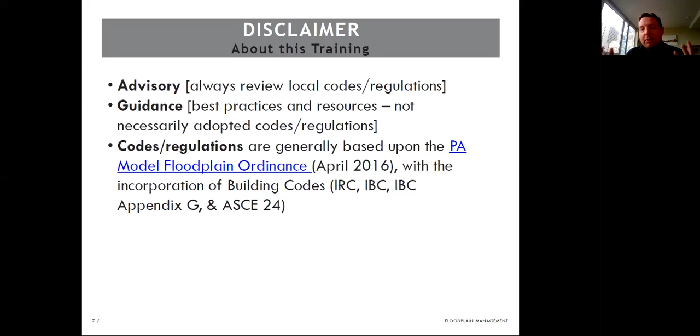Just to give you an idea of what today's presentation will encompass, I always like to start off with the types of flooding in Pennsylvania. These show what happens across the state. We all have riverine flooding. We also have dams and levees throughout the state that could potentially fail and cause flooding events. We're seeing increased rainfall throughout the Commonwealth that are attributing not only flooding, but also landslide conditions, among many others.

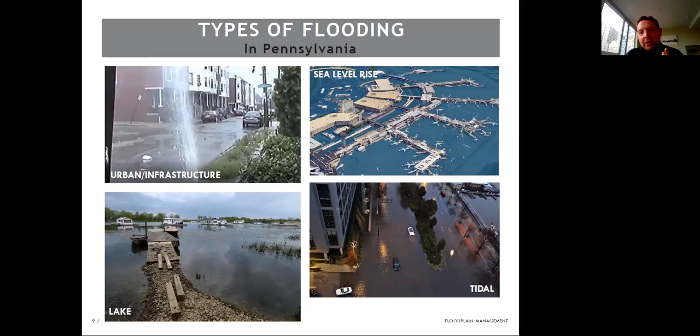Up in northwestern PA, we have lakefront flooding, Lake Erie. We also, on the east coast or east side of Pennsylvania, have the threat of tidal flooding as well as sea level rise. This image shows Philadelphia International Airport slated to be totally inundated by year 2100. So this just gives you a sense of all the different types of flooding.

But for today's presentation, we'll focus specifically on this typical cross-section, typically of a riverine flood condition. We're going to be talking a lot about the special flood hazard area, which is encompassed in this cross-section, specifically known as the 1% annual chance flood event, and formerly known as the 100-year flood event. But 1% chance is the new common language there.

Within this cross-section, you'll see the floodway, which is typically the stream channel, and then on either side the flood fringe, where predominantly where development is occurring today in the Commonwealth, with maybe some minimal development in the floodway. So every time I talk about floodplain management, special flood hazard area, we'll be talking about this cross-section for today's presentation.

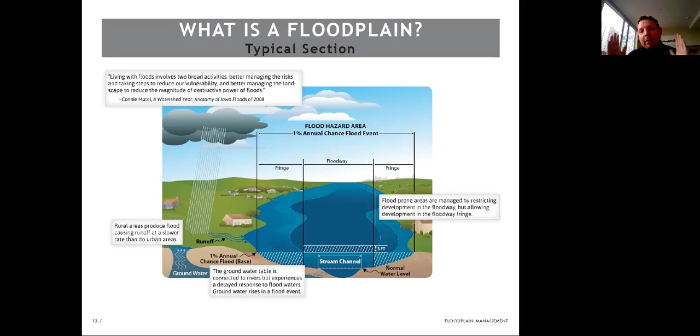I like to start off with some of the roles and responsibilities, specifically the role of a floodplain administrator or floodplain manager. It may even be the zoning administrator or building code official, depending on your local jurisdiction. Make sure you know who is responsible for administrating the floodplain regulations.

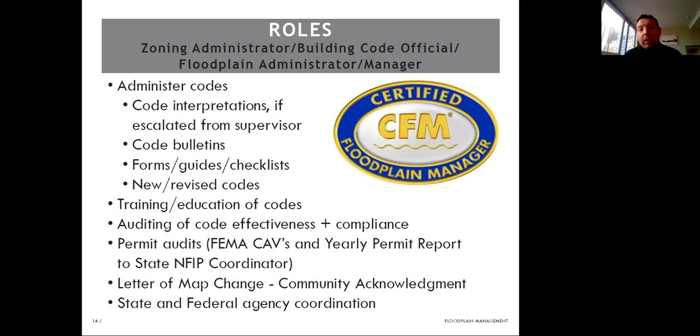That administrator has to do everything you see here: adopt compliant codes and regulations, permit development, conduct training, do auditing, as well as coordination with state and federal partners.

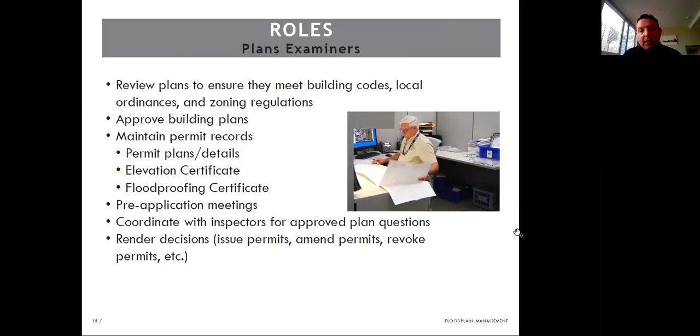It's also important to realize that there might be others involved with floodplain permitting, specifically plans examiners. So although the floodplain administrator might be located in the zoning department or be a floodplain manager separate from zoning, the building code examiners and zoning plans examiners might have a huge role in making sure that floodplain management regulations are enforced. Even the building inspectors, not only during permitting but during construction, have key roles in making sure they are meeting what was designed and approved at the permit step.

Finally, design professionals play a vital role in all floodplain management. They also tend to give me the biggest headache in floodplain management—specifically land surveyors, architects, landscape architects, and engineers. Many varieties of engineers are involved in designs in the floodplain, so making sure these design professionals are aware and educated and are designing compliant development in floodplains is extremely important.

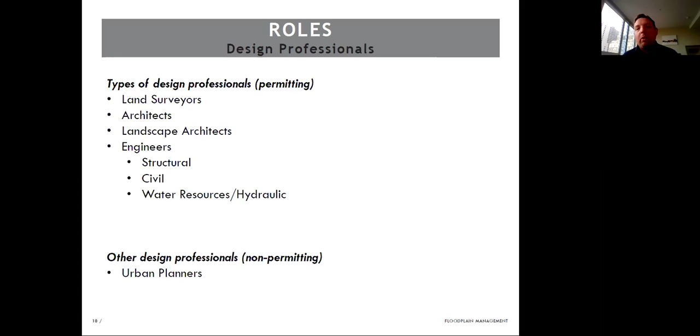And not to forget the urban planners. Planners play a vital role in land use decisions as well as long-range plans, really identifying where those no-build or limited-build areas are in our floodplains.

Okay, so today's floodplain management training will encompass things related to the National Flood Insurance Program. We'll dive a little deeper into flood hazard information, specifically FEMA maps. We'll focus heavily on regulations—really like to dive deep there. We'll talk a little bit about elevation certificates, followed by letters of map revision or map change. And then I'll provide you a host of resources.

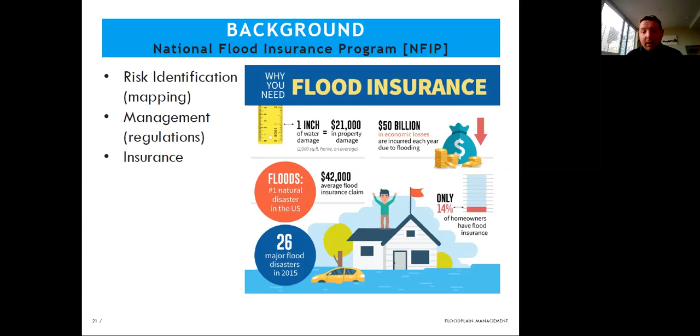The program was created in 1968 because there wasn't the availability of flood insurance on the private insurance market. In Pennsylvania, every jurisdiction—every borough, township, etc.—is mandatorily required to adopt floodplain management regulations through Pennsylvania Act 166, adopting and enforcing the minimally compliant state regulations.

The key benefit to this in Pennsylvania is that we can offer all of our residents throughout the Commonwealth flood insurance, no matter if you're at the top of the hill, the bottom of the hill, in the floodplain, or outside the floodplain. Anyone in Pennsylvania can get flood insurance through the National Flood Insurance Program as a participating locality.

You also can get grants and loans. If there was a disaster, you can get disaster assistance, but you can also get grants and loans for mitigation projects. Finally, if you're located in the special flood hazard area—that 1% annual chance flood event area—you are mandatorily required to have flood insurance if you have a mortgage or a federally backed loan against that property.

So it's vitally important for properties bought and sold in Pennsylvania to have the availability of flood insurance, with the caveat that today in Pennsylvania there is the availability of private flood insurance, but that could go away tomorrow, much like the wildfire insurance in California that we're seeing. But there also is the national flood insurance that's available here in Pennsylvania.

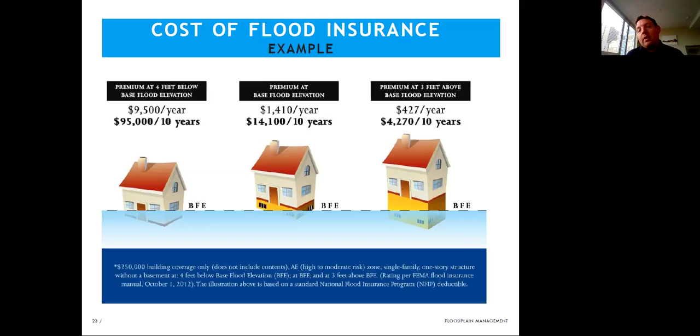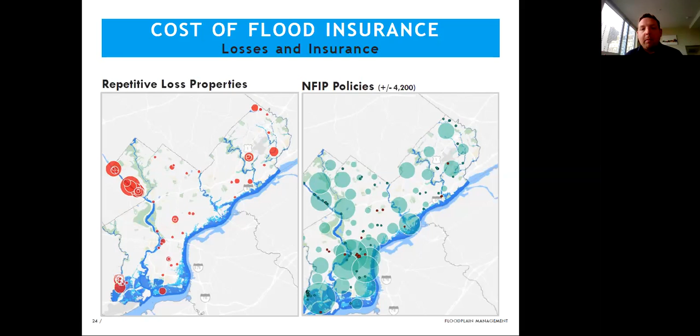Some of the bigger red dots on the left side represent $1.5 million worth of payouts for one individual property. This information can be vitally important and can be accessed from FEMA through a special request.

Getting back to the National Flood Insurance Program, there are federal, state, and local responsibilities. At the federal level, they have program oversight, FEMA Region 3 specifically for Pennsylvania as well as all surrounding states. They provide the risk mapping, establish development and building standards in general, and provide the insurance coverage. At the state level, we have an NFIP program manager, Bill Bradfield, and the state can help with oversight as well. They can be your first stop before going to FEMA Region 3 for any questions or technical assistance, and they provide the minimum state model ordinance.

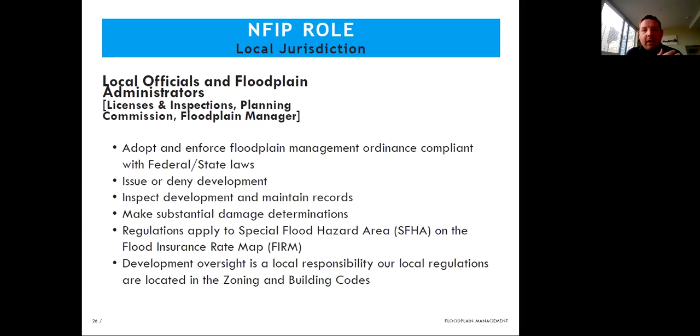Those are the minimum standards that each jurisdiction within Pennsylvania must adopt. The bulk of responsibility falls on our local jurisdictions, which, as you can imagine, is very complicated in Pennsylvania. We have over 2,500 jurisdictions, and each one should have an identified floodplain manager. They should have adopted compliant regulations and should be issuing development permits for any development in the special flood hazard area, which can be extremely challenging, especially in Pennsylvania where some jurisdictions have only volunteer staff. They also make substantial damage determinations, which we'll get into, and oversee all development, whether through a standalone floodplain ordinance, zoning code, building code, or all three.

Every 5 years, FEMA can do what they call a community assistance visit, which is their fuzzy word for an audit. Pittsburgh had theirs in 2014 when I was a floodplain manager, and Philadelphia had theirs in 2016. These visits or audits show all the non-compliance issues related to development in floodplains. FEMA Region 3 does an exhaustive review of permit documentation and also conducts floodplain tours in your jurisdiction. In both Pittsburgh and Philadelphia, we had hundreds of violations.

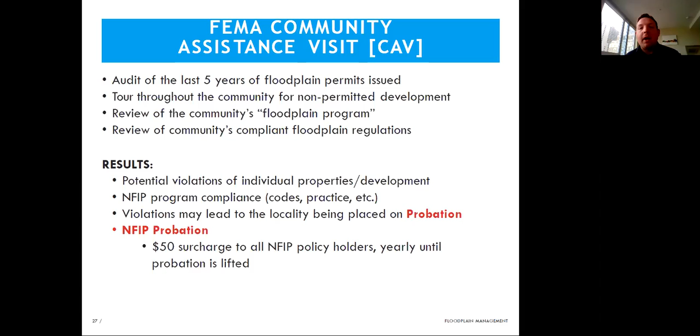These violations could cause the municipality to be put on probation, which means a $50 surcharge for all policyholders within that jurisdiction until it becomes compliant again with NFIP. The worst case scenario, which has happened in Pennsylvania, is full suspension from the National Flood Insurance Program. So if you haven't adopted a compliant ordinance, or aren't remedying the issues found in community assistance visits, your municipality is no longer eligible for the National Flood Insurance Program, meaning no more federally backed mortgages or loans unless you go private flood insurance, and no more disaster assistance if a flood event impacts your area.

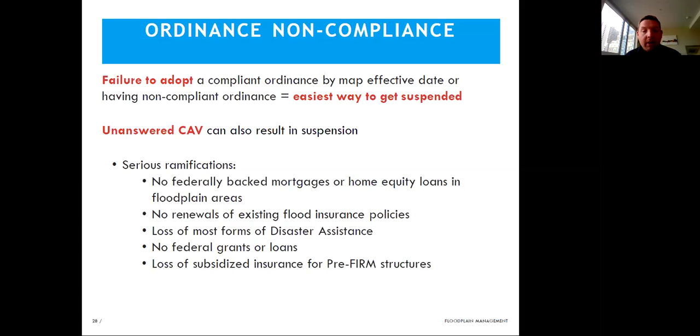Now we're going to get into flood hazard mapping. How many people out there have seen a FEMA flood map or visited the FEMA Flood Map Service Center? I hope a lot of you are saying yes. This is what the Flood Map Service Center looks like. It's much like Google, you just type in an address and an interactive map shows up at the bottom. We're lucky enough here in Pennsylvania to have almost the entire state covered by digital maps, which is really unique for the country.

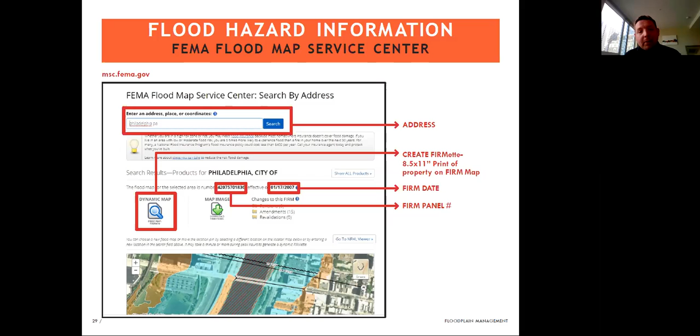When you go to the Flood Map Service Center, type in an address. If you click the magnifying glass with a little paper icon, it will print you an 8.5 by 11 exhibit. This exhibit gives you everything you need to know in general about your property, whether it's in the special flood hazard area or outside. This specific map shows a riverine condition here in Philadelphia.

You'll see the river flowing through the middle of the map with a hatch line. That hatch line represents the floodway, going back to that cross section a little bit earlier. On either side of that floodway is the blue shaded area, that is the flood fringe. Together, that hatched area as well as the blue area represents the special flood hazard area, or the 1% annual chance floodplain. On either side of that, in general, is the orange area, known as the 0.2% chance floodplain, formerly known as the 500-year floodplain. Anywhere else on the map that is unshaded are minimal areas of flood hazard.

Some other key things to identify on flood maps is that there are black lines that transect these floodplains. Those represent cross sections, which can be found in your flood insurance study, the FIS. Those help you identify the base flood elevation, that elevation of the 1% annual chance flood, to the nearest 10th decimal. I'll show that here.

This is an illustrative image of what a flood insurance study looks like, specifically a cross section. So when you see those black lines, you open up the flood insurance study, also found on the FEMA Flood Map Service Center. You can identify, to the nearest 10th decimal, the base flood elevation for any individual parcel or property located in the special flood hazard area.

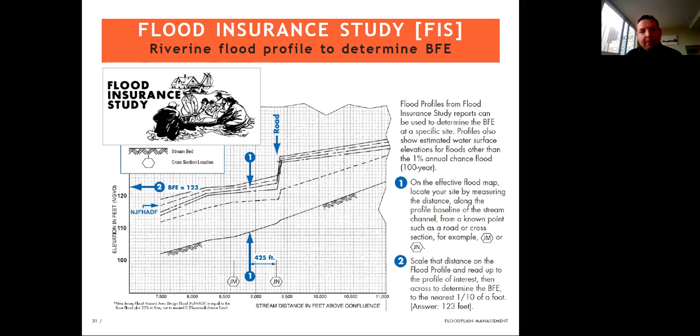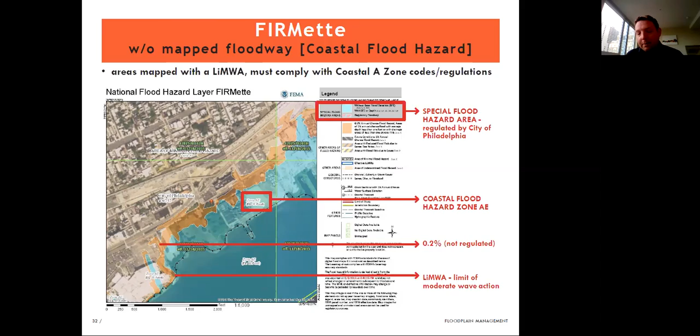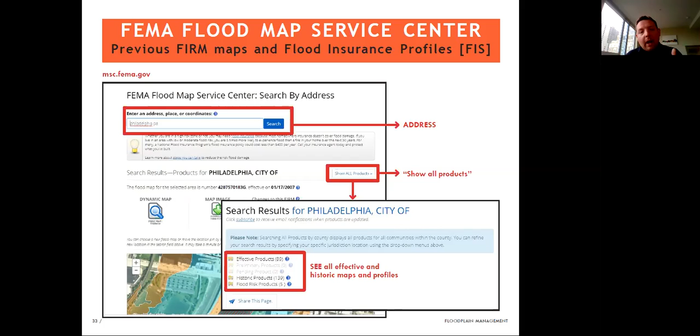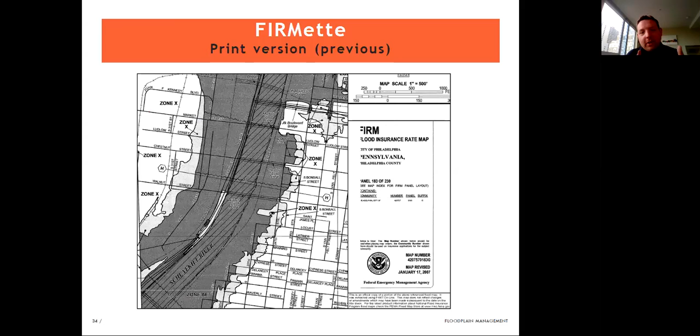That's some other key information on the Flood Map Service Center. For those that have seen the historic maps, they used to be printed before they became digital, and they were black and white, like is shown here on the screen. So instead of being blue and red hatch and orange, they were just black and white as shown here.

Another key thing for all those floodplain administrators out there today: you can actually sign up for notifications to get emails for when there is any sort of product change in your local jurisdiction. It's really important, if you are that floodplain administrator, to really keep track of all the changes that are happening to your flood insurance rate maps. You can do that on the Flood Map Service Center.

Okay, so now we're going to get into the regulations. This is my sweet spot in terms of floodplain management. And it's also some of the most challenging. It depends on where you're located.

Again, like the disclaimer said, your floodplain management regulations can be your standalone regulations. They can be in your zoning ordinances, your subdivision regulations, your building codes, your stormwater codes, your health codes, or all of the above. So it's really important to understand where the floodplain regulations come from in your locally adopted regulations.

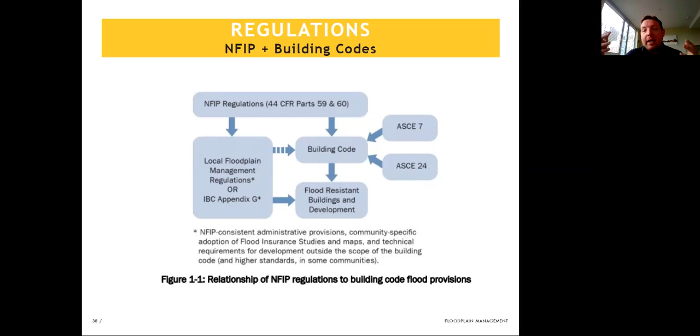And how this all works together is that there are the federal 44 CFR NFIP regulations. Those flow down to those state model ordinances or those building codes, and the building codes can feed off of that as well. There's other American Society of Civil Engineer codes, like I stated earlier, that ASCE 7 and ASCE 24, that can feed into this as well. But one thing to note is that there are a lot of conflicts.

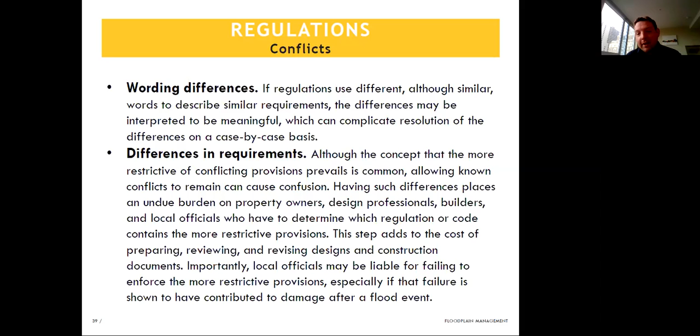So if you are regulating with building codes, zoning codes, and model ordinances, make sure you know the wording differences and the differences in requirements. It's vitally important for floodplain administrators and for design professionals. It's also important to understand the approach.

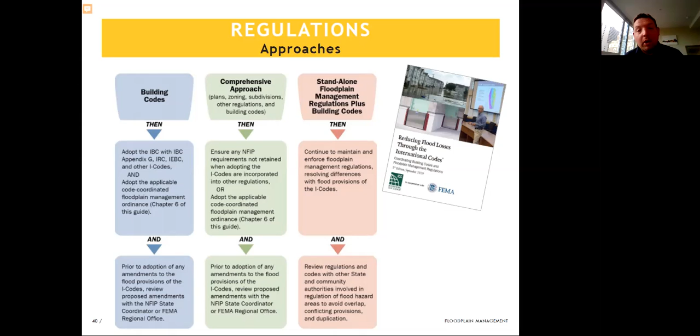You could have the standalone building code approach in your jurisdiction. You could have a comprehensive approach, which is everything I stated before: zoning, building, subdivision, health codes, stormwater codes. Or you might even have a standalone floodplain regulation or ordinance with the addition of building code. So you can have any of these or all of the above within your jurisdiction.

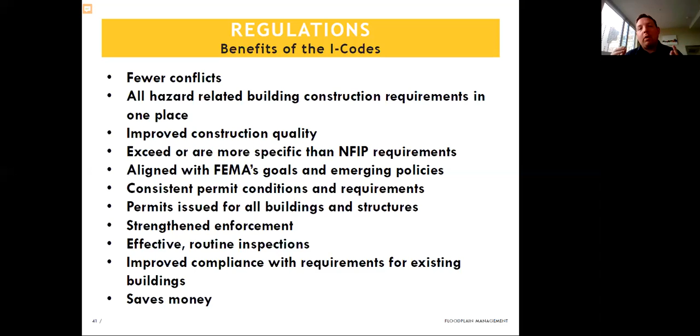One of the benefits of regulating off of the international building codes is that for every dollar spent to become floodplain compliant with those I codes, you are saving $6 in mitigation costs. So I codes can be extremely beneficial to take your model ordinance or your zoning code and really take that to the next level for building resiliency in floodplains. But you also have to make sure that the building codes are very specific to buildings, so there are some loopholes when you only use building codes.

I like to start off with the definition of development before we dive deeper into very specific design challenges in floodplains. I like to bring up this definition because it's more than just traditional definitions of development. It goes beyond just new construction, renovation, alterations, additions. Floodplain development is all encompassing. Any man-made change is considered development in floodplains, even temporary storage and structures, or temporary or permanent storage of materials. So log piles or mulch piles are technically development when located in floodplains and must be regulated.

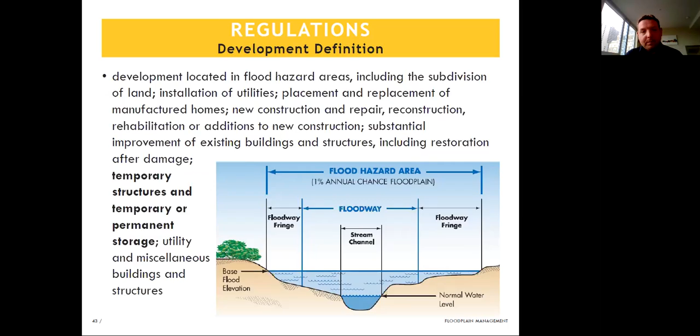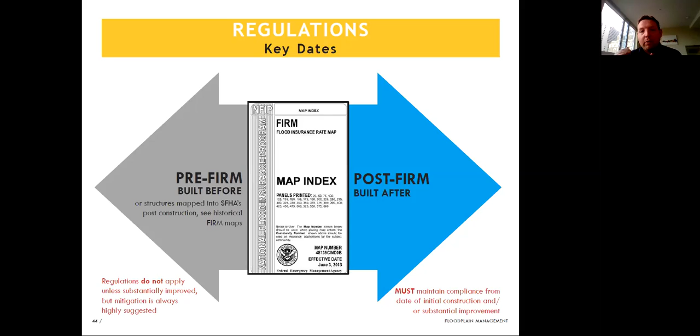It's also important to know some key dates. Every jurisdiction has these dates, whether you're pre-FIRM or post-FIRM. Pre-FIRM are structures that were built before your local jurisdiction had floodplain maps and floodplain regulations, so these are structures built before there were requirements to build elevated or dry flood proof, etc. Anything built in your jurisdiction in floodplains after adopted regulations or maps are called post-FIRM structures. Those structures were built to some sort of floodplain regulation, and they must maintain that compliance in perpetuity.

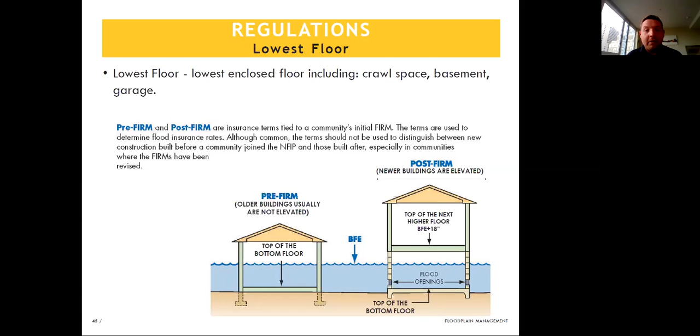What this means is typically pre-FIRM structures in Pennsylvania are structures with basements, and post-FIRM structures are slab on grade or elevated structures. If you've been to the Jersey Shore or any of the shores, houses built on grade at the shore versus elevated are pre-FIRM versus post-FIRM.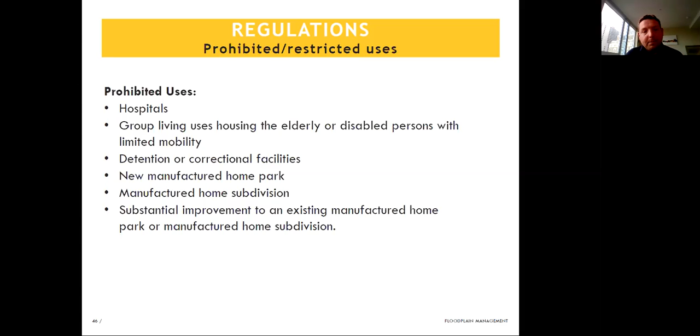It's important to note that there are specifically prohibited and restricted uses in floodplains. Prohibited uses like hospitals, group living, housing for the elderly, senior housing, detention and correctional facilities, manufactured home parks are prohibited in the special flood hazard area per the state model ordinance. There's also restrictions and prohibitions on dangerous development, specifically the storage or production of hazardous materials in the special flood hazard area.

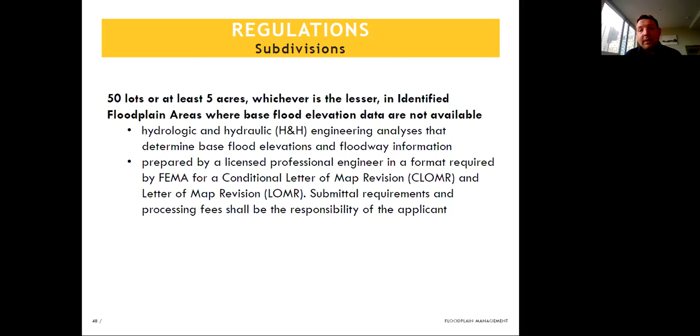Subdivisions are also regulated, so anything over 50 lots or 5 acres, whichever is lesser, must be regulated in the special flood hazard area.

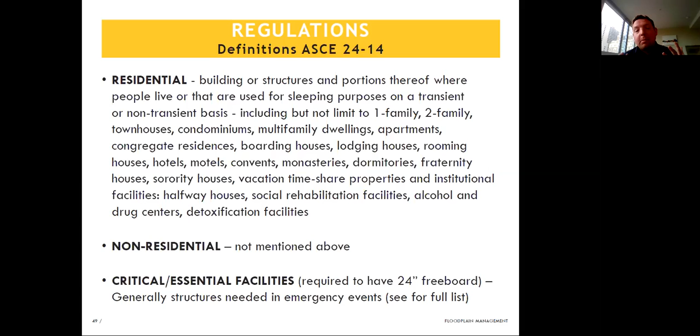And then they go a step further. There are non-residential structures that are critical or essential facilities, so things like EMS, fire, police, and some aviation facilities are considered critical or essential. They actually have a higher requirement in terms of development in the special flood hazard area, in this case being 24 inches above that base flood elevation.

One of the most prevalent building permits that you'll receive as any sort of floodplain manager is for existing structures, with one of the most challenging parts of floodplain management being the definition of substantial improvement. Substantial improvement is when you renovate, rehabilitate, or add an addition to a structure that is more than 50% of the market value of the existing structure—then that structure is deemed substantially improved, meaning it must become compliant with the adopted codes and regulations of today.

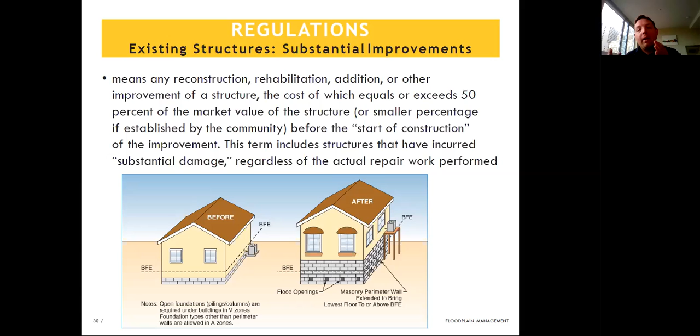So whether it's a pre-firm structure or a post-firm structure, as soon as you exceed that 50%, the structure must be compliant with the regulations of today. The reason this is one of the most challenging concepts in floodplain management is establishing the value of the structure as well as establishing the value of work. So a number on a building permit is not acceptable when making substantial improvement determinations.

You must have a detailed cost estimate associated with that permit, whether it's a zoning permit, building permit, or floodplain permit associated with that application to have the documentation. The documentation for substantial improvement must include all materials, labor, profit, and overhead, anything that's physically built into the structure, built-in appliances, built-in cabinetry, all finishes must be included in that detailed cost estimate.

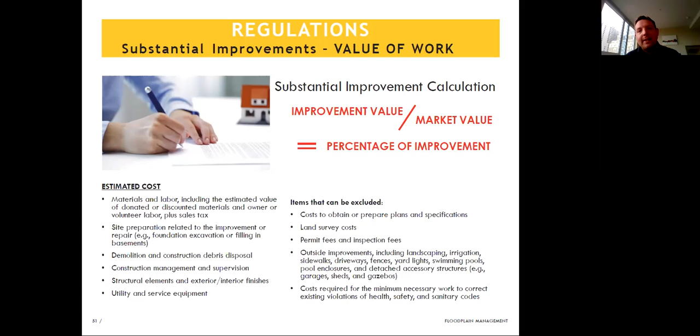And then you must establish the market value. The market value is referring to the value of the structure minus the land, making it even more complicated. Luckily, in Allegheny County as well as Philadelphia County, we have amazing tax assessment or property assessment websites where they actually break out the building and the land. So to make this substantial determination, you always factor that against the structure only value, and 50% of that value triggers substantial improvement.

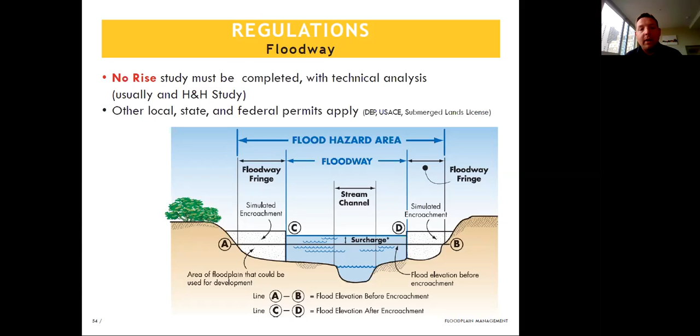Okay, getting into floodway development. Floodway development almost always requires a no-rise certificate, which is typically supplemented through an H&H study. There's also always federal and state permits that apply, typically because the floodway is the channel of the stream in most cases. So these are the main requirements here. In some jurisdictions they allow floodway development, in some jurisdictions they do not. So make sure you're looking at whether you're minimally compliant or if you have higher standards adopted in the floodway, because these are the most hazardous areas for construction in the special flood hazard area.

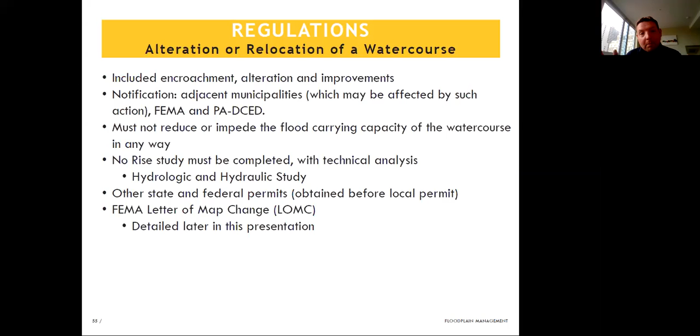It's also important that alterations or relocations of watercourses require a lot more permitting. They require state and federal permits, so DEP and Army Corps, to name a few, but they also must require the no-rise study, and in some cases they will require a FEMA letter of map change, which we'll talk about later. This applies to everything from stream restoration projects to floodplain restoration projects.

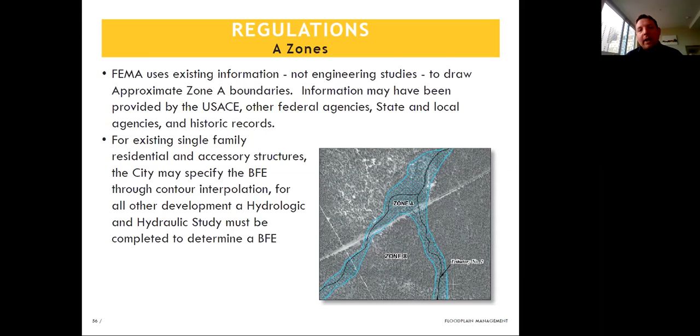A-zones are extremely difficult zones to regulate development, and they occur all over the state of Pennsylvania. These zones are called A-zones because they are approximate zones in terms of FEMA regulations, meaning FEMA did not have enough technical data to map a base flood elevation associated with these zones. So they're just identified as flood hazard areas, but did not have enough technical data to actually establish that base flood elevation. So in almost all cases, any sort of new development in these A-zones requires significant engineering study and analysis, which could be more costly for the applicant. The applicant or jurisdiction should always reach out to FEMA to get the data they had, as a starting off point for any H&H or engineering analysis.

Diving a little bit deeper into solely residential construction, residential construction must be elevated base flood elevation plus 18 inches here in Pennsylvania. So that is all living spaces - living rooms, offices, bedrooms, rec rooms - must be elevated 18 inches above the base flood elevation.

In residential construction, you cannot have below grade spaces, so below grade on 4 sides is prohibited. However, you can have spaces that are enclosed below that BFE plus 18 inches, as long as it's used solely for parking, building access, and incidental storage. If you do have those spaces, they must allow floodwaters to automatically enter and exit those enclosure spaces, typically through the use of flood vents, which I'll show you on a few more slides.

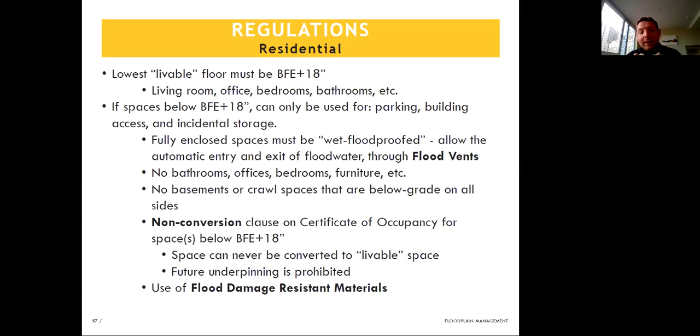It's also important that, in the age of Uber and autonomous vehicles, you can never convert these parking, building access, or storage areas into livable space. So no offices, guest bedrooms, rec rooms, or bathrooms can be converted into these livable spaces. In some cases, you may require a non-conversion clause on your certificate of occupancy. They also need to be designed with flood damage resistant materials, which we'll get into a little bit later.

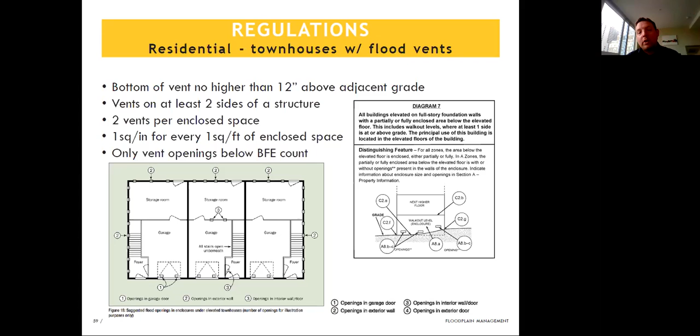Throughout the state, we have a lot of townhome developments, which can pose some even more challenges with flood vents. Townhomes, even the middle home, do require flood vents on two sides of the structure. So they must be on the front and the back of the structure, as well as in any walls in between those spaces. So in the middle here, we see a storage room and a garage. There have to be flood vents between those two spaces in order for the floodwaters to automatically go through the structure.

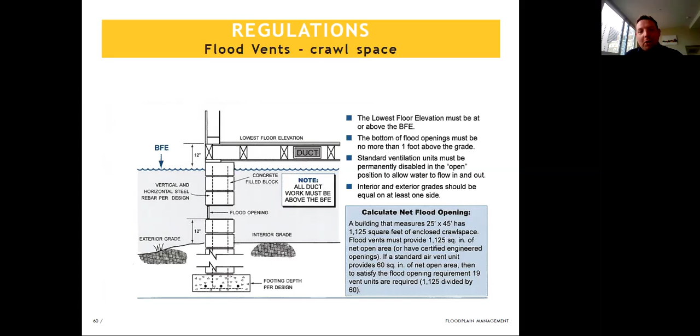It's another cross section, again, a house that's elevated 18 inches above, or in this case, 12 inches above the base elevation, which was the minimum federal standard, but in Pennsylvania, 18 inches above is the minimum standard. But here again, you see the flood vent no more than 12 inches above that exterior grade. I can't tell you how many times I've seen flood vents installed 18 or 24 inches above adjacent grade, which can cause those foundation issues. And we'll talk about elevation certificates later, but on A8 and A9 of elevation certificates, you actually identify the flood venting that is installed or designed to be installed in structures.

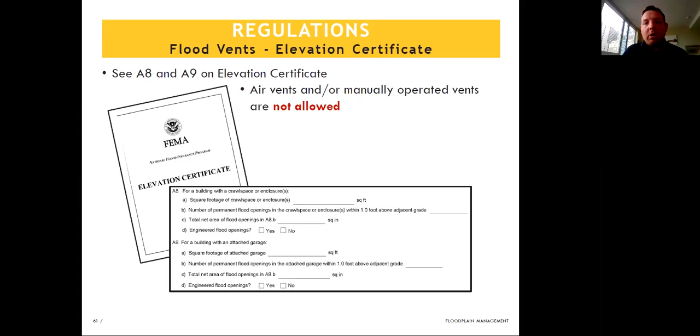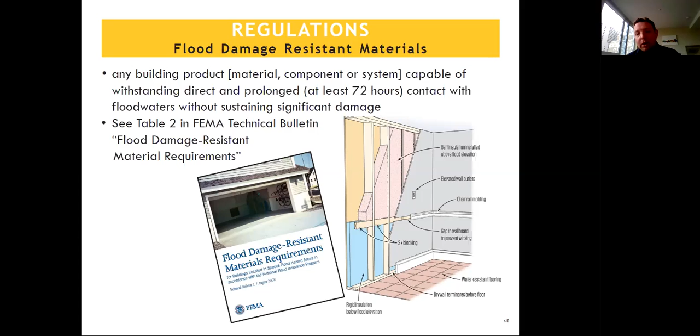Getting back to flood damage resistant materials. When you do have that automatic entry and exit of floodwaters in structures, these parts of the structures must be designed with systems that can have direct and prolonged contact with floodwaters of up to 72 hours. There's a great table in the flood damage resistant materials FEMA technical bulletin that identifies things like batt insulation is prohibited, but rigid or foam insulation is allowed, as well as masonry materials or metal materials versus wood materials in these flood damage resistant material areas.

When we talk about non-residential structures, you have two options in general, unless you've adopted higher standards. The one option is just like residential, you elevate everything 18 inches above that base flood elevation, with the caveat that you can have parking, building access, incidental storage below. Or you could actually design the structure to be dry floodproofed. So if it is non-residential, you can have spaces below that BFE plus 18 inches, but you make sure that water will not enter the structure in the event of a flood, which can be challenging and costly. The Army Corps suggests that you only do it up to 3 feet.

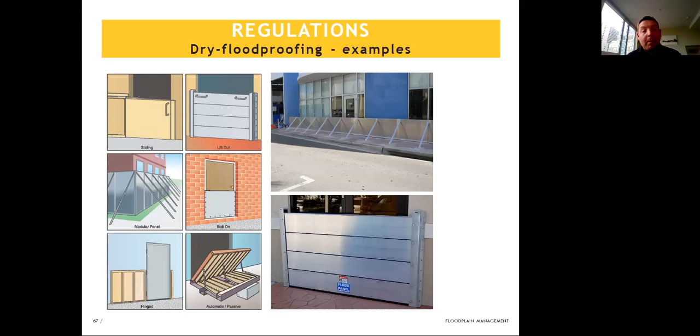And typically we see these types of flood shields installed. They're usually manual interventions because the automatic ones cost 4 to 6 times more expensive than the manual interventions. But these are gates that go across doors and windows or any sort of opening on the exterior of the structure. It's also vitally important that you do a lot of structural loading criteria because remember, instead of the equalization of those flood loads, you're going to have all those flood loads on the foundation walls. So that's why the Army Corps suggests trying to do this only up to 3 feet. But again, I've personally seen it done up to 8 to 10 feet on structures.

Another consideration is mixed use structures. So in some of the more urban areas throughout the Commonwealth, we have a lot of mixed use structures being constructed in floodplains. And these pose even more challenges. And you have to think of them almost as two separate structures. All of the residential portions of the structure must be elevated 18 inches above the base elevation, whereas those non-residential portions, the CVS, the Rite Aid, the restaurant, those can be below that BFE plus 18 inches, but they must be designed to be dry floodproofed.

And one important factor here is lobbies with desk attendants, furniture, mailboxes, trash receptacles, gyms, amenity spaces. Those are considered residential portions and they must be elevated 18 inches above the base flood elevation. With the caveat that if the residential and the commercial share one lobby, that lobby is allowed to be dry floodproofed per FEMA technical bulletins, which I have that resource at the very end of our presentation.

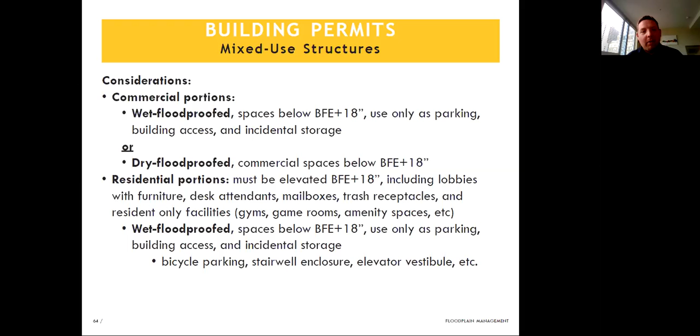Another requirement is the dry floodproofing certificate. This also can be extremely problematic. In my time in Pittsburgh, an architect and engineer fought for 6 months about completing the FEMA dry floodproofing certificate. These are challenging because they come at the very end of a project. So the design professional might submit the building permits and then step away from a project.

But at the very end of the project, before you get the certificate of occupancy, that design professional, whether it's the architect or engineer, must come out to the structure and certify that it was built to be dry flood proof, not just designed to be dry flood proof.

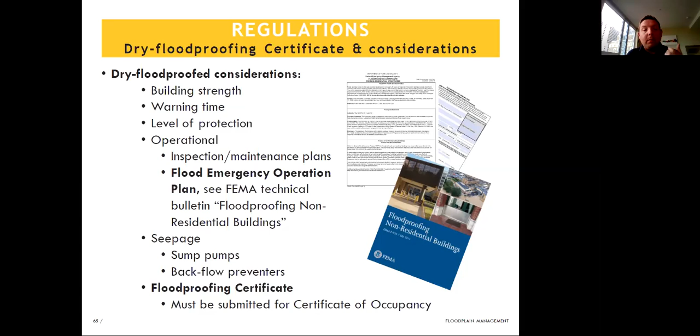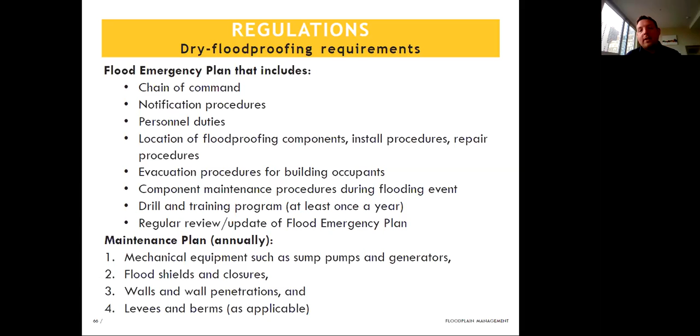It's extremely important that you produce a flood emergency operations plan, which includes dealing with seepage or leakage, so sump pumps or backflow preventers. The plan should cover the chain of command, how you get notified of a flood event, what personnel has duties to get floodgates out of storage and into their tracks, and how you maintain the floodgates, since they often have gaskets that can dry rot and deteriorate, so maintenance should be incorporated. You should even consider doing a flood drill, like a fire drill, at least once a year to keep up the practice installing these floodgates.

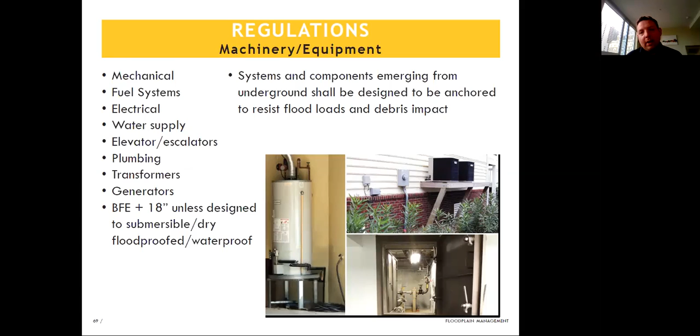For machinery and equipment, the general rule is that if it cannot be inundated by floodwaters, it must be elevated 18 inches above the base flood elevation, and wherever it's elevated must be anchored or secured so it doesn't become buoyant or float around in a flood event. Things like AC units must be elevated and anchored so they don't break away. The one caveat is that plumbing fixtures, like in the bottom right image, might be fine being inundated by floodwaters, but they might have electronic components to open and close valves, and those components can't be submerged, so make sure they're designed correctly.

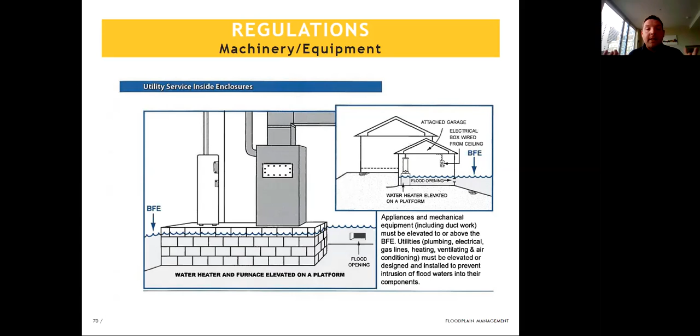This shows inside a structure that is wet flood proofed, with a masonry plinth that elevates the hot water tank and HVAC in this instance.

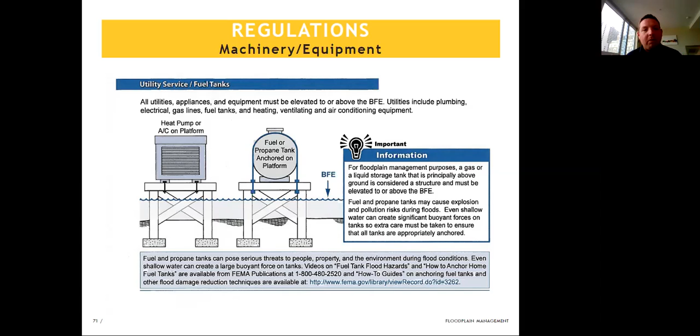It's also one of my pro tips that you must look at the accessory structures in development, specifically fuel tanks, AC units, transformer pads, or generators, since those are sometimes outside of the building envelope. Those too must be elevated 18 inches above the base flood elevation. They're extremely important because the main reason residents or occupants can't re-enter a building after a flood event is the electrical components being out of service. I can't tell you how many times I've seen transformer pads adjacent to a structure well below that base flood elevation, so make sure you're looking at all of those accessory structures.

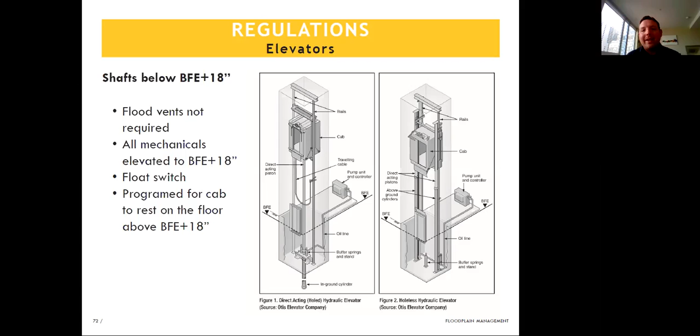Elevators have three main requirements. Elevators with a pit that goes below the base flood elevation plus 18 inches must have their mechanicals elevated 18 inches above the base flood elevation. They must be programmed so that the cab always rests on the floor above BFE plus 18 inches, so if you have a garage space that gets wet flood proofed, that cab should always rest on the floor above that garage space. Finally, it should have a float switch so the cab never enters an inundated pit in an elevator shaft.

Sanitary systems, whether municipal or on-site, should not allow the infiltration of floodwaters. On-site disposal systems should almost always be located outside of the special flood hazard area, though there are some exceptions, but you still have to meet state and federal regulations.

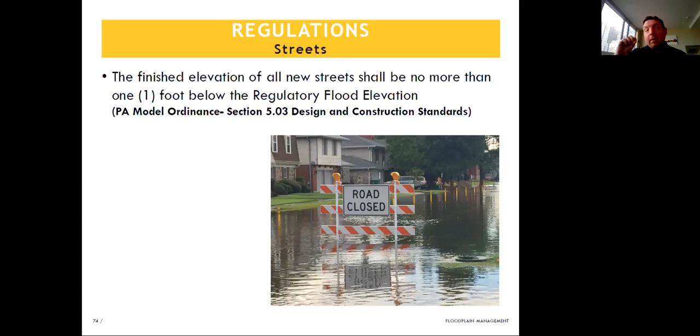Streets, believe it or not, are found in our PA floodplain model ordinance. Streets must not be more than 1 foot below the regulatory flood elevation. In our state model ordinance, the regulatory flood elevation is BFE plus 18 inches, so streets must not be more than BFE plus 6 inches in Pennsylvania.

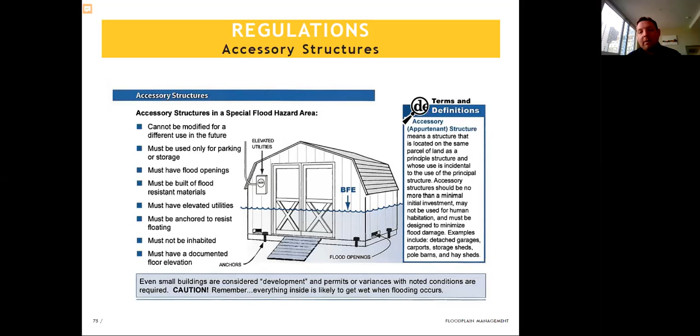Accessory structures are as vitally important as the transformer pads I mentioned, like shed structures. This shed, to be compliant, must only be used for incidental storage. It must be anchored so it doesn't become buoyant and damage downstream bridges, buildings, etc. It must also have its mechanicals, if included, elevated 18 inches above the base flood elevation.

Recreational vehicles and trailers are also regulated, since that definition of development is expansive in floodplain management. They must remain on a site fewer than 180 consecutive days and be fully licensed and road ready, or else be anchored and elevated like permanent construction.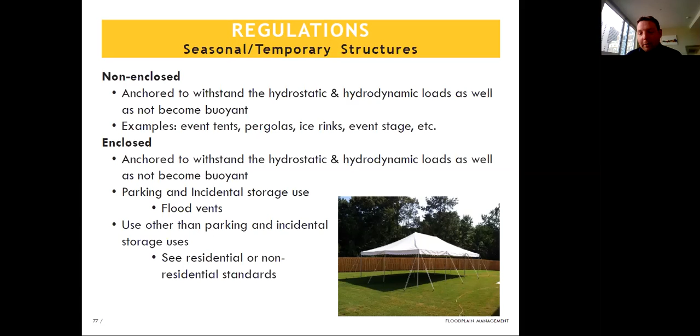Storage is also of concern. Here in Philadelphia, we unfortunately have a lot of junkyards along the Delaware River located in the floodplain. For a junkyard to be compliant, each car must not have any hazardous materials, and each one must be anchored or elevated, or anchored and elevated depending on the anchoring system used. That also goes for log piles and mulch piles.

We also, during our CAV here in Philadelphia, had a lot of building going on, specifically construction trailers. Construction trailers, or any type of trailer like this, would need to be compliant, much like recreational vehicles, if on site less than 180 days. This one in particular, because it's up on blocks, would need to be anchored and elevated to become compliant, or anchored and dry flood proofed, which may prove to be challenging.

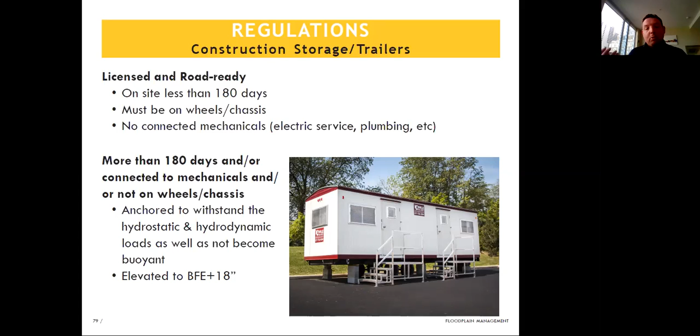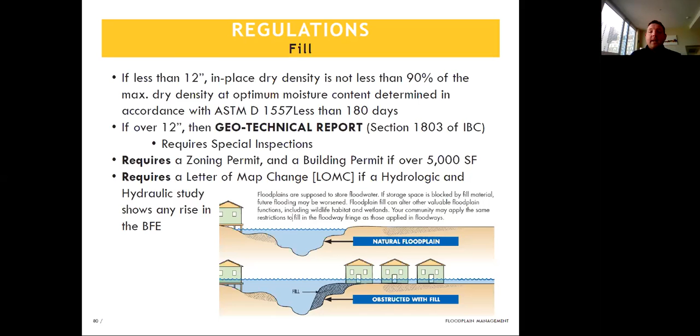The placement of fill is equally important. Fill can fill in a bathtub and cause adjacent properties to flood. So there are some requirements, typically geotech reports, and potentially a letter of map change for the placement of fill in the floodplain.

And then finally, historic structures. Historic structures are one of the few structures that can more easily receive a variance. Specifically, if filling in windows or doors, or physically elevating a historic structure, would require it to be removed from its historic designation, you can receive a variance for those code compliant items. However, other items like mechanicals and flood damage resistant materials should be incorporated into the design to reduce flood risk as much as possible, because although you're getting a variance, there's still tremendous flood risk for historic structures in the floodplain. This structure actually has all of its mechanicals peeping up off the roof of the structure.

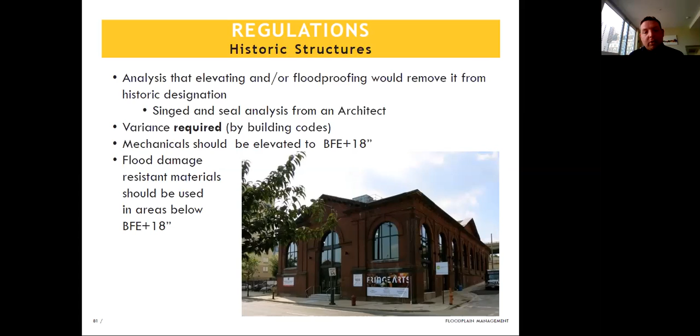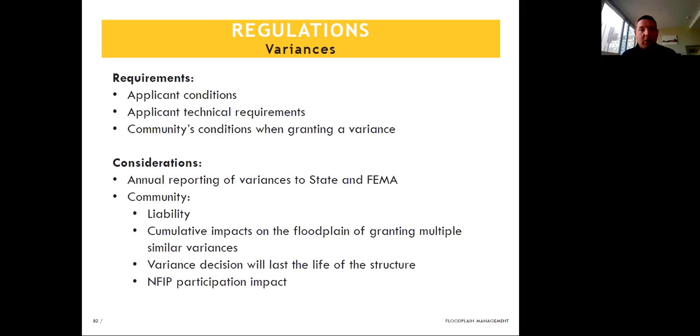So variances. This is the final slide of the regulations section. Variances are interesting in floodplain management because there are special conditions for both the applicant and the city or municipality when issuing variances in floodplains. Please review your zoning code, the state model ordinance, or your building codes, because there are specific variance conditions in all of those different code applications.

Okay, so elevation certificates. How many people out there have seen elevation certificates, filled them out? How many have seen complete or correct ones in their time? I jokingly say that because as a floodplain manager, I've reviewed hundreds of elevation certificates, and I'd say 99% of the time it makes me want to pull my hair out because they're non-compliant, not completed correctly, inconsistent, or not even completely filled out.

So make sure that you read the instructions, confirm it's the compliant edition, and in some cases require it three times during development. This is best practice: requiring it when you submit plans to the city for permitting, again when the lowest floor is installed during construction, and then when construction is substantially complete.

In general, all the lines must be completed on elevation certificates, and when they don't need to be completed, you should put NA. They should also be completed by a licensed surveyor, architect, or engineer. And the base elevation should always be in the correct vertical datum associated with the FEMA flood insurance rate map, rounded to the nearest 10th decimal point, with no whole numbers used, using those cross sections and identifying the base elevation accordingly.

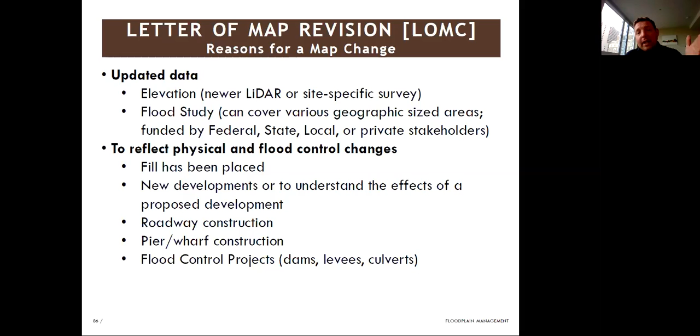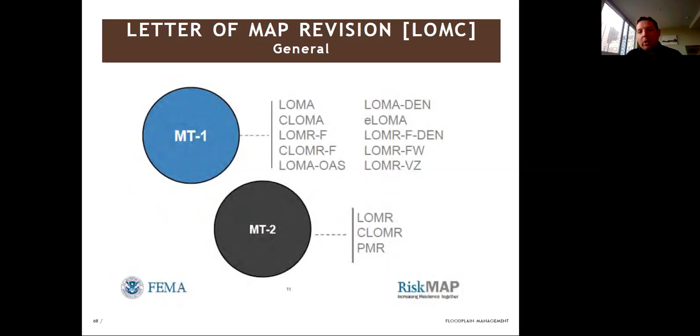These are specifically an application to FEMA with some community input on that application. So when I talk about letters of map change, I talk about a variety of different options, specifically these two: the MT1 and the MT2. MT1 has a whole host of different varieties, I call it, and then MT2 is a little bit more challenging and has a little less in terms of its offerings. So those are the LOMRs and CLOMRs as part of the MT2.

MT1s do not result in a physical change to the locality's effective flood insurance rate map, it's a determination for a single property, whereas an MT2 does result in an official revision of the effective flood insurance rate map. So those are the important things. MT1s can take a few months for submission and review, where MT2s can take up to 6 to 12 months in some cases. Again, there's public input for MT2s, there's appeal processes, there's even notification in the local newspaper for the MT2s.

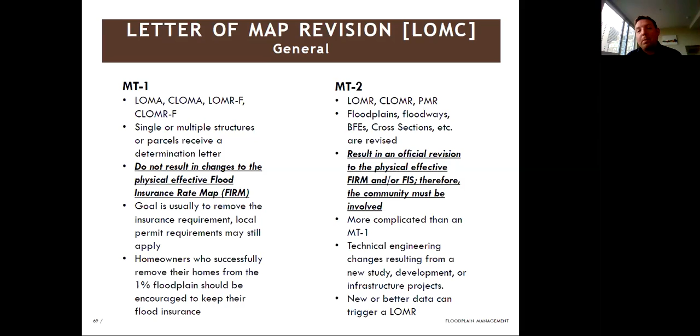The reasons for a LOMR include modified hydrology, modified hydraulics, better LIDAR or site-specific surveying, a modified floodway, a new bridge or culvert, an installed dam or levee, or there might just be a large enough development to warrant a letter of map revision.

CLOMR-Fs and LOMR-Fs specifically are called out when you place fill on a site to elevate structures or buildings above and outside of the special flood hazard area. The general rule here is once you elevate a site with fill, you do not re-excavate for basements. I can't tell you how many conversations I've had with designers and developers where they want to place fill to build the building above the base flood elevation plus 18 inches, but then they want to come back through and excavate it for its development purpose.

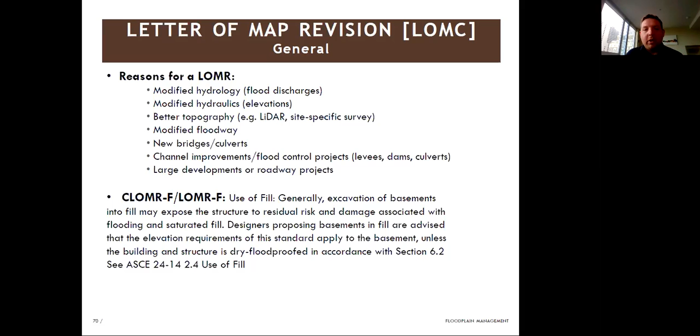One final thing about letters of map change: the community acknowledgement forms that are required. This is the one process where the community must sign off on the application that a developer is submitting, unless it's a community application, but it's through a community acknowledgement form. This is where the local floodplain manager or official has to confirm that all local minimum requirements are met for that development in relation to any sort of letter of map change.

The general rule here is, as floodplain managers, don't just sign the application. Make sure you review it thoroughly, all of the approved permits for the site thoroughly, and then even do a comment sheet attached to it that says it meets X, Y, and Z and why it meets X, Y, and Z. And don't be afraid to not sign it. If you do not concur, don't sign the community acknowledgement form.

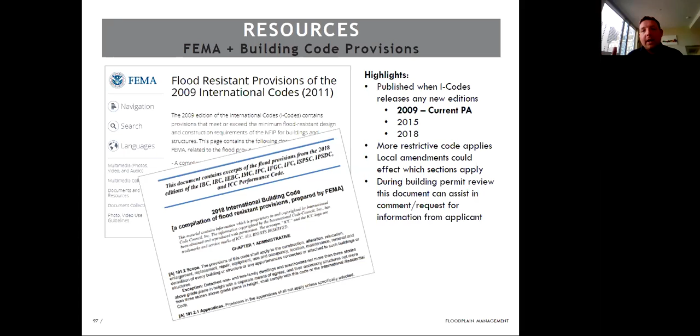There are hundreds of pages, but they are extremely informative if you're dealing with substantial improvement problems or dry flood proofing. Every year that the building codes are updated, FEMA releases a really good PDF online. In Pennsylvania, we currently use the 2009 I-codes, so you can just Google or click the link here to find those code revisions.

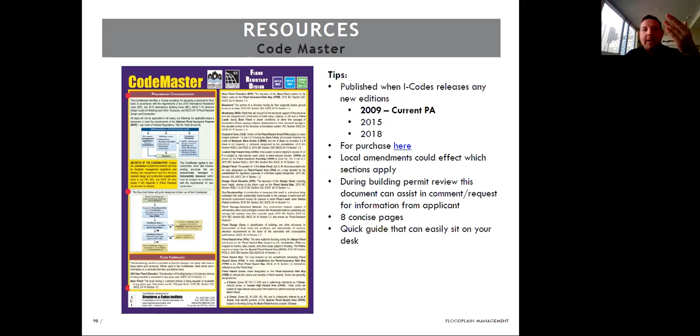FEMA pulls out all of the codes in the I-codes and puts it in one really nicely packaged PDF resource. There's also an amazing code master, a laminated pamphlet you can buy that sits on your desk if you're reviewing plans in the floodplain, and they also release this every time the I-codes are updated.

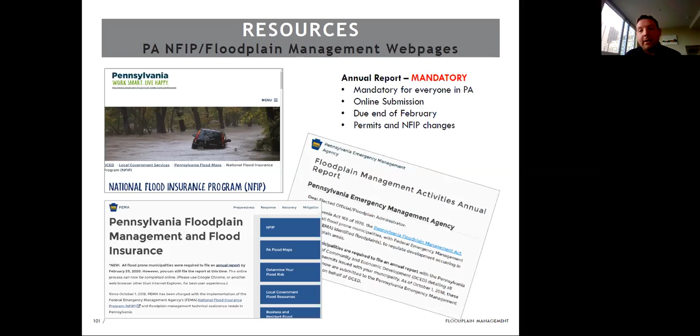There's also a lot of resources from the state: the state floodplain management insurance page, as well as the annual report. If you're a floodplain manager, every year the state requires you to submit an annual report, and there are consequences if you don't. That report covers everything from how many building permits you've issued that year to whether you've changed any of your regulations. It's a mandatory report, and I have a link to that on this slide.

There's also a lot of training. TrainPA and the PA Construction Codes Academy provides a lot of training in terms of floodplain management. There's also specifically targeted training through the National Floodplain Manager Association, the ASFPM, and then locally through PAFPM, which I'm the vice chair of. We have a few of our board members on the call today.

Specifically, PAFPM is offering a floodplain training symposium on March 16th and 17th, so please go to our website for more information. We also provide a bunch of webinars. On October 22nd at noon, we're offering a really great webinar about modeling in terms of floodplain management and stormwater management. Since my first slide started with Philadelphia, where I currently reside, I'm going to end the presentation today with the city of Pittsburgh.